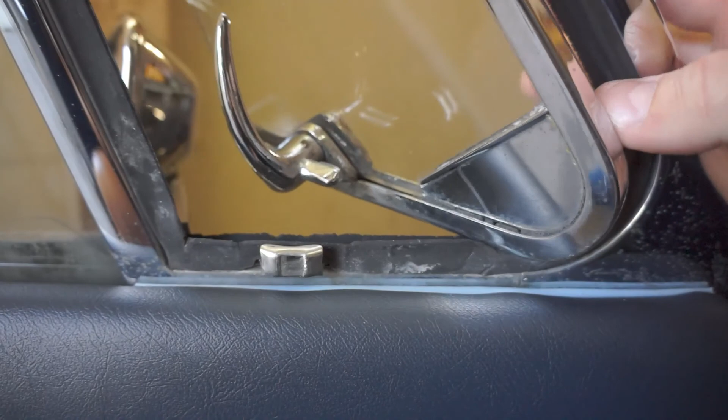Alright, next project here on the channel is going to be this rubber molding around this quarter window here, the vent window in the door. So you can see how mine, well, if I don't get too close, is brittle and worn pretty heavily. In the corners here, it's definitely brittle and cracked. So I'm gonna take this quarter window out and replace all of the rubber that goes around here, and I'm gonna show you how to do it.

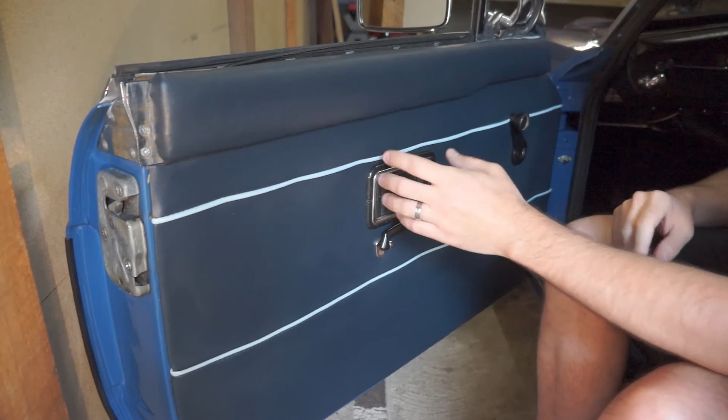To remove this quarter panel vent window, you have to take off, well, not obviously, but you have to take off a lot more of the door than you might think. You can't just pull out this piece. You have to remove the main window, and for that, you have to remove all the interior trim.

So there's a screw here on the window reel, 2 screws, actually 4 total on this top trim piece, and then this pries apart here for the interior door handle, the door latch, and then there's 2 screws here on the pull, and then there's a bunch of snap rivets all throughout the actual door panel. So we'll go ahead and start removing those now.

And these pieces just pry apart right here. You gotta be careful not to damage the top part. It's going to be tight against the actual trim here of the door.

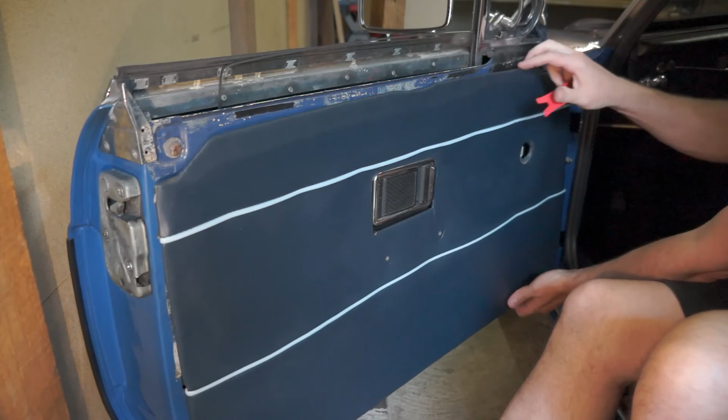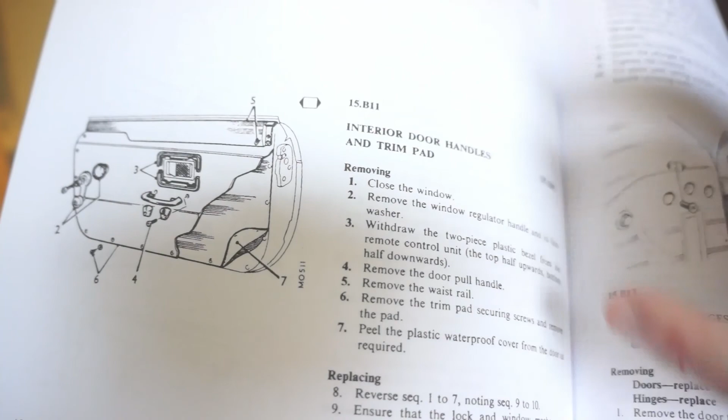Alright, what we just did is 15B11 in the service manual. So if you're following along, we've removed all the interior trim pieces. So we're done with 15B11. We'll move over to 15B8, removing the door glass.

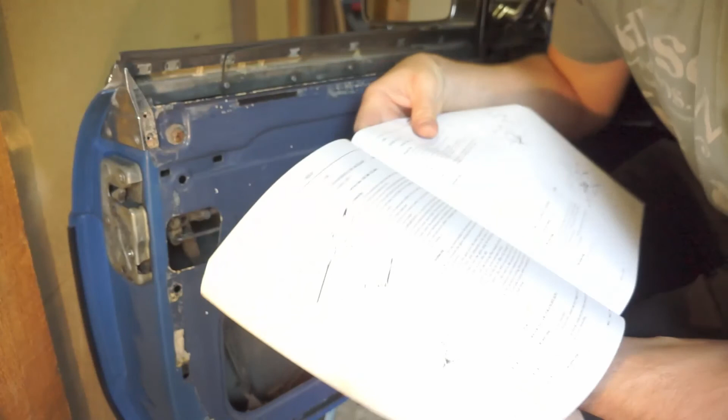The next steps are to remove the screw securing the top rear of the door. So there's a screw that goes right in here up top. So I've removed that screw, and then down the bottom it says to remove the stop bracket for the door glass. Now in the picture, it's not the clearest picture. Let me see if I can have it focus here.

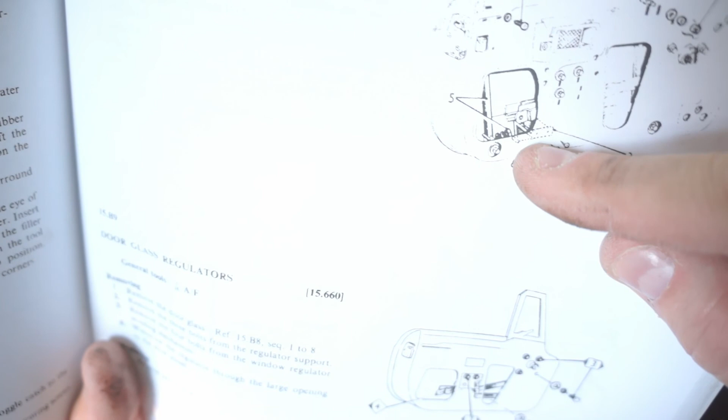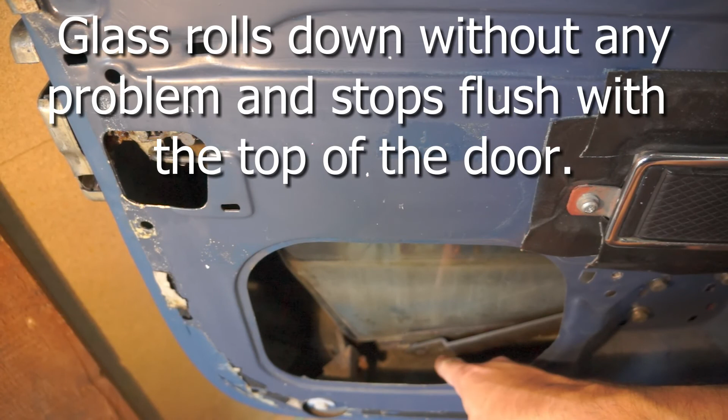In the picture it references the stop bracket for the door glass, which is supposed to be down below the door glass as part of the regulator unit, or underneath the regulator unit. I'm going to show you what I'm looking at here on the actual car, and I don't have anything down below. It shows it being right here, and I don't have anything there, no stop bracket. So I'll go on to the next step.

So next it says to, after we remove the screw up here, roll the window all the way up, remove the vertical channel. So you have to take out this nut down here, which is a 7/16, which I've already loosened up. And then it might be a little fiddly to try to get it out of here, but you have to remove it through the bottom, I believe. So I'll go and take this right out of the hole here.

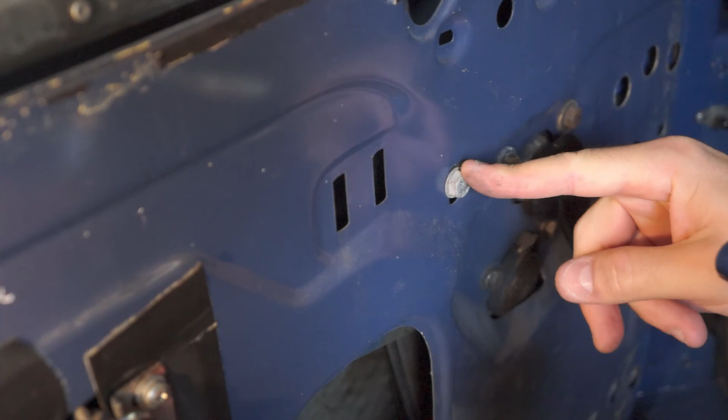Okay, next on the list is to remove this stop. It's what's referred to as remove the stop for the window regulator. So it's this bolt right here, and basically it goes through, and if you feel it on the other side, as you roll the window up, you can feel that it will prevent the window from going up too far. That's right here. It's in this little channel here, so it can probably be adjusted up and down.

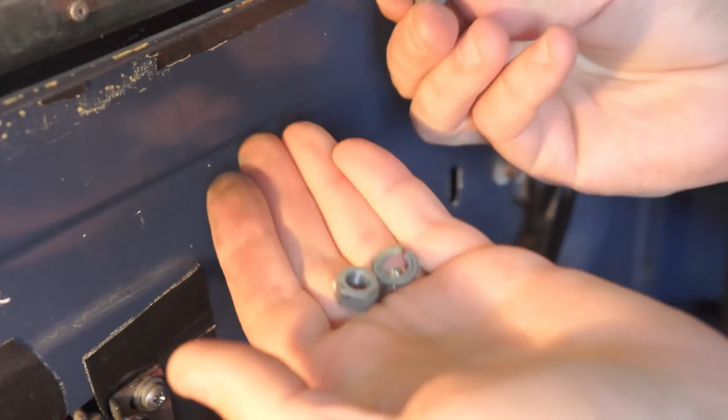It's a 1/2. So just remove that. It's basically just a bolt that goes through and stops. I don't know if this is aftermarket or if this is original. It's just a bolt on mine that prevents the window from going up too far.

The next step is to remove this corner block, and it's just press fit. It's a piece of rubber that's press fit in, and it stops the window from going up too high. This is going to be a brittle part if it's been in there a while, so I'm expecting it to crack. So make sure you order a new one of these if you're going to be doing this job.

So basically what you have to do is push out from the top and try to get this top bit to come out. There we go. Once you get that top out, it'll slide up and out. So that's what it looks like.

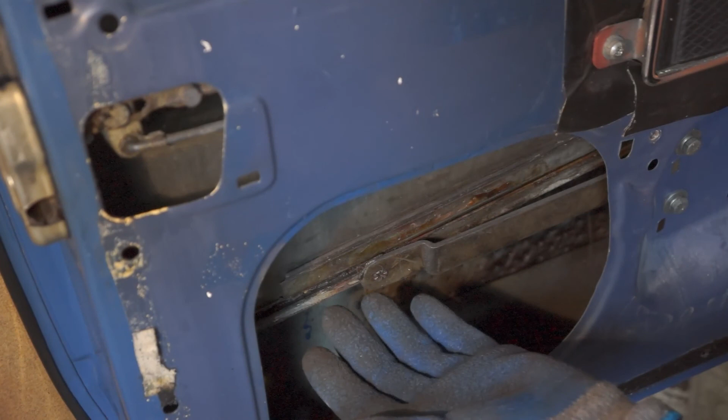Okay, this next bit is a bit messy. Basically, this channel here that the window regulator moves the window up and down on. If you reach back here and you feel, good idea to wear gloves on this part because there's a lot of grease in here and also sharp edges. This back channel here, you'll be able to feel on this metal. If you slide your finger along it, you can feel there's a cutout in the back of it. So what they tell you to do is you want to remove from the regulator this channel.

So you have to move it all the way up and guide it along, make sure it goes into its groove. Move it all the way up, and then once you get it all the way up, now with the corner piece removed up here, it allows the window to go up higher than it normally would, right here.

And so you move the window all the way up until it won't go anymore, which will be about 1 inch to 1.5 inches above this vent window. And now what you do is you move it backward, and you'll be able to lift it out of the regulator.

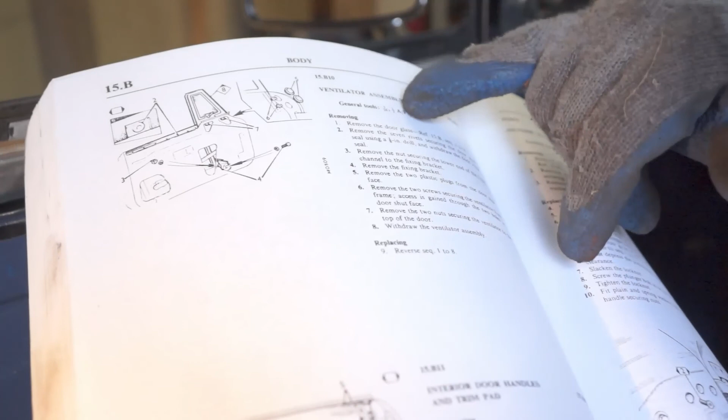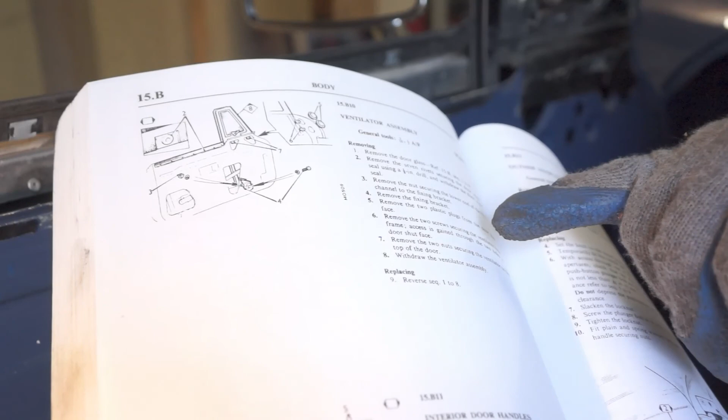Alright, now finally we're on to the next step, ventilator assembly. So we're removing this quarter glass here, which might not be in the frame, but steps here are to remove the door glass, and so we've already done that. And now we'll go on to the actual steps to remove this vent glass.

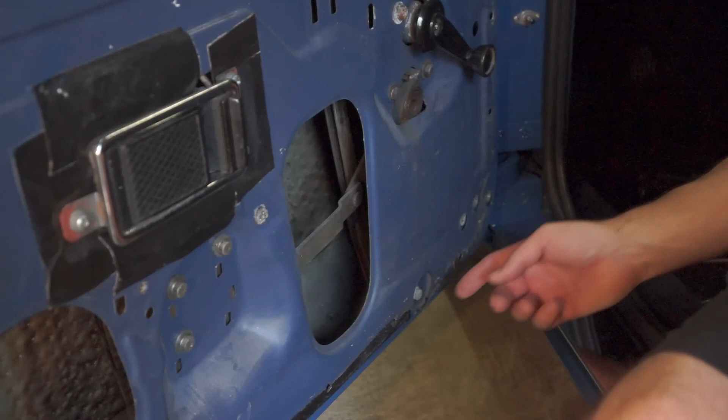Next it says to remove these rivets here, to remove this top seal. And I'm going to try to do this job without removing those because I don't have to rivet them back in. So we'll continue on with the next steps. If we have to come back and it prevents it from actually removing this vent window, then I'll go back and do it. There's a nut here, which I think is a 7/16, which holds on the bottom of the channel.

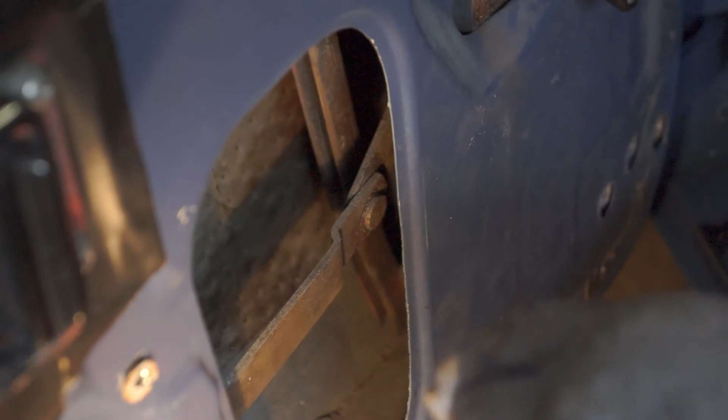Okay, after you remove that nut, there's a small plate here that attaches to the bottom of the channel that you have to remove as well, so you can slide the whole thing out the top. So you'll have to get your, let's see what size it is. It's probably a 7/16 as well. And remove that. Okay, the next step is to remove the 2 plastic plugs here. One of them's already removed.

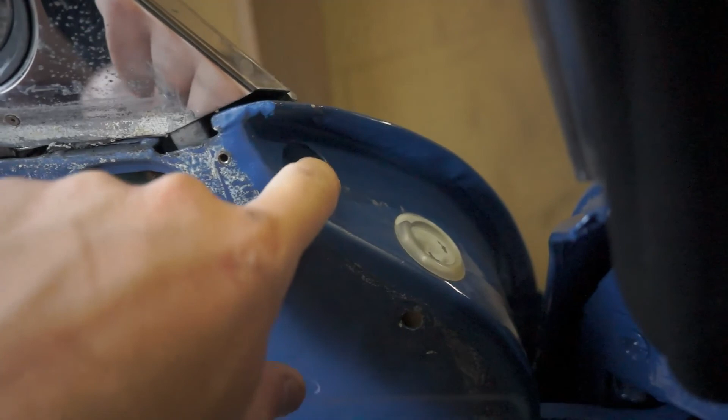Once you get those 2 blanking plates off, the 2 rubber grommets, you can see there's one here, and underneath in there there's another nut or screw that takes a 7/16, and so you have to fit it around there. This one's pretty tight, so you have to use a thin wall 7/16, maybe a quarter drive 7/16 to get that one out. But then you just remove those 2 screws. Next, to remove these 2 nuts here from the bottom.

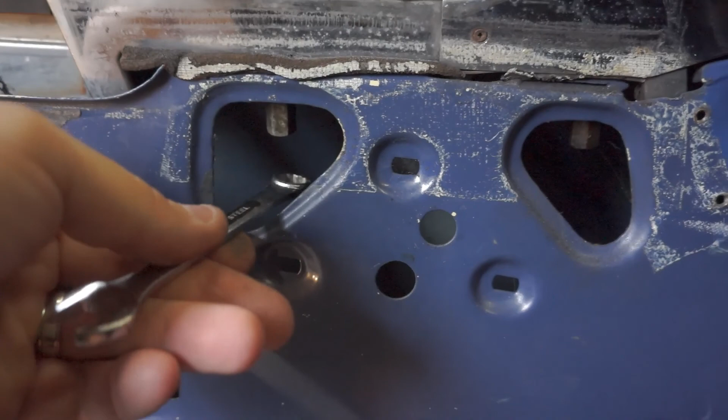Those are 3/8. Okay, the next step is to withdraw the ventilator assembly, so it should just pull out as long as... pieces falling apart there. I have to figure out what those are. As long as I don't have to remove this trim here. Oh, let's see, maybe not if I roll the window down. You twist it 90 degrees. And you pull it out. There we go. Nope, you don't have to remove that. Good. You don't have to remove this trim piece here.

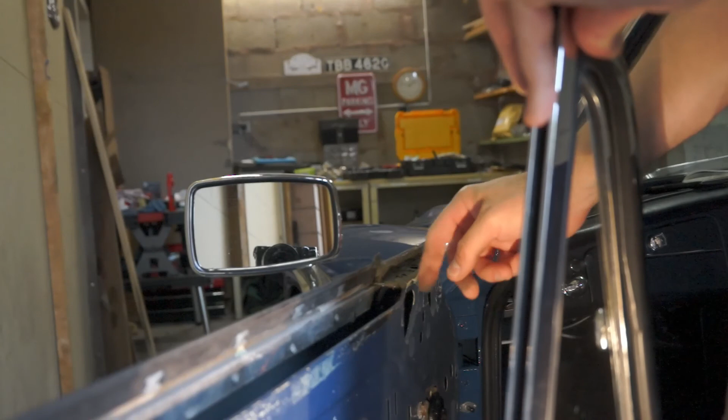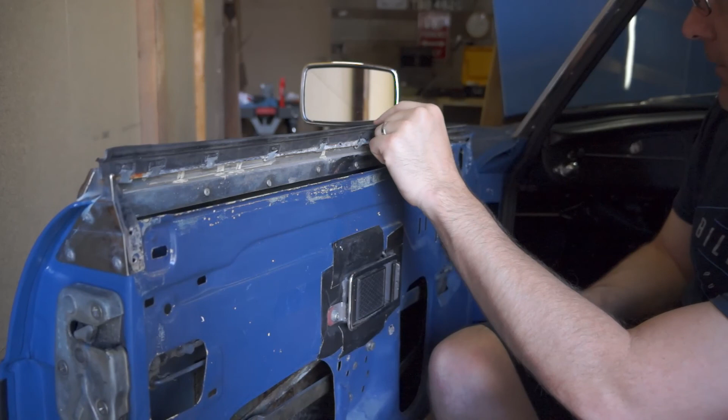I mean, it would help, but if you roll the window down, the problem is this bottom bracket here, but you can get that out past the regulator assembly if you roll the window down a little bit. I'm also going to replace this top piece of rubber. Again, I'm trying not to remove this strip here that is pop riveted into the door. So you can get to these clips right here.

There's several clips that hold this piece of rubber in, and you just kind of slowly work your way down the line, prying a little bit and then pulling up on this piece of rubber, and it'll come out eventually. So you can get new clips for this, which is advisable, but if you're careful enough, you probably can reuse these. Mine are in pretty good shape, they're not rusted out or anything.

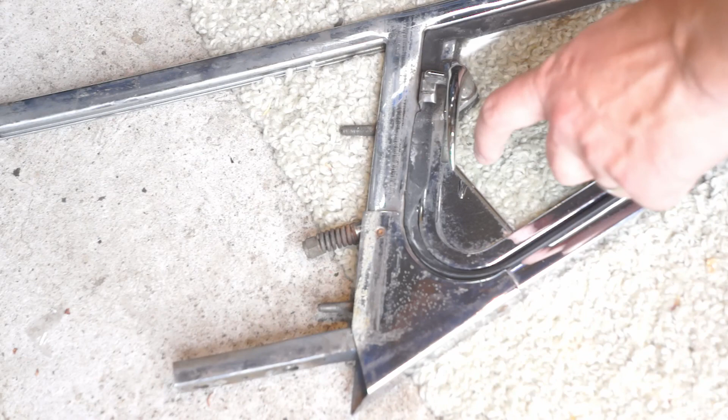Okay, in order to get the vent glass out of this assembly, there's a Phillips screw in here, and mine are pretty rusted, so I'm hoping I don't have to drill them out, but there's a flathead on the side here, and you can take off this little corner piece. Alright, next we'll take off this bottom nut on the spring right here.

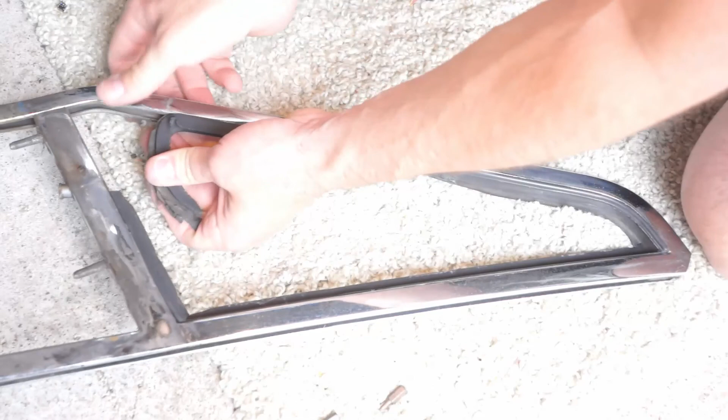And then the window just kind of unseats from its little clip right here, and you can pull it out. Set that aside, and now we can remove the gasket from inside here. And you can see how brittle and nasty this old gasket is.

In order to get the glass out of this vent panel, just stick a piece of plastic up into the top corner here and gently pry it out. You don't want to bend the chrome here, and you don't want to break the glass, obviously, but if you do it slowly and gently, the glass will eventually work its way out.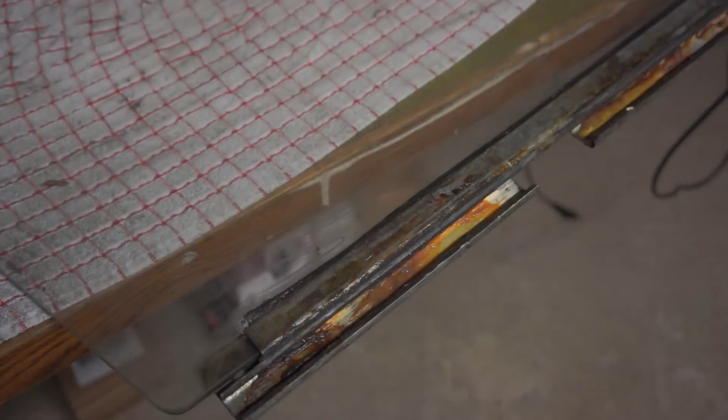One tip is, if you plan on redoing the rubber inside of this seal here while you have the whole thing apart, is mark where the channel goes on your glass so that you can install this channel in the same spot, so that the glass will be able to go up and down easier without you having to mess with it.

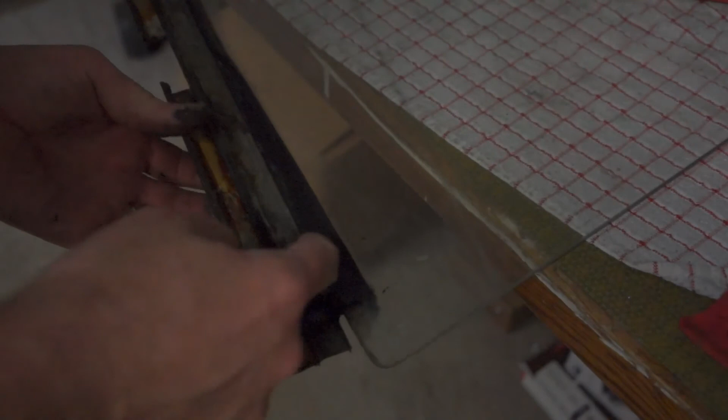So I know the back of the metal here is right there, and I'll mark that line, and I'll try not to rub off this Sharpie as I uninstall and reinstall the new one. This is probably going to be pretty difficult to get apart, but if you take a tool such as this and pry the two bits apart, it'll eventually come apart.

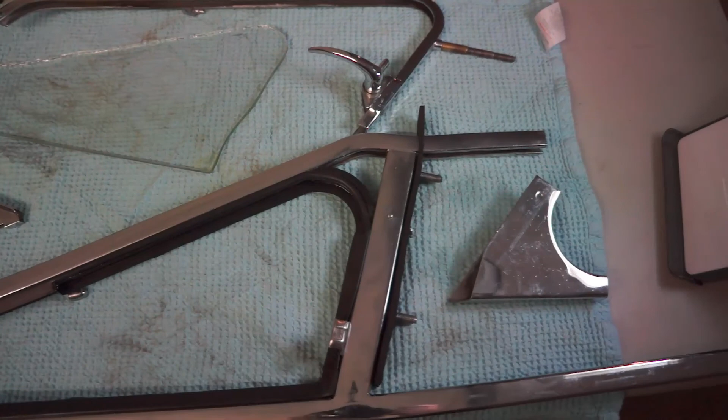Alright, we're going to go ahead and call this video a wrap, and in the next video we'll cover all the installation, both of the glazing that goes inside the channel here, as well as the glazing on the bottom of the door window, and the reinstallation of this vent window inside of its frame, and then the reinstallation of everything back inside the door.